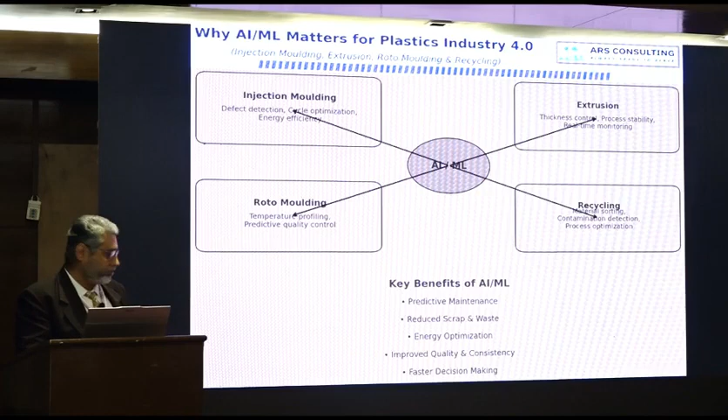Now, what are the myths? Everyone thinks that once AI comes, automation comes, our jobs will go away, manpower will be at risk, unions will form. Not really. It is still a myth. Why is it a myth?

The concern is automation removes jobs. Not really. In automotive AI, ML, IoT, it is just automating the task, but not the jobs. You need a programmer, you need a performer, you need a person to access the IoT. So it will not take away the job.

Second myth, it reduces the operator need. Not at all. Operators become smart machine operators. So we are elevating the operators, not taking away their jobs.

Third, data replaces decision making. Not at all. Data just supports human management. Ultimately, human resource is the one who decides.

Fourth, machines control everything. Not really. Humans train the machine, the machine does not train itself. Humans train the machine, monitor and optimize the machine.

Last, as I said, everyone's job will go away - not really, that's the myth of loss of employment. Upskilling happens in AI and ML, and reallocation of manpower occurs. So if anyone says AI/ML will take away jobs, we can confidently say no, not at all. In the plastic industry, we are creating smart manufacturing, so it will create more jobs for human resources.

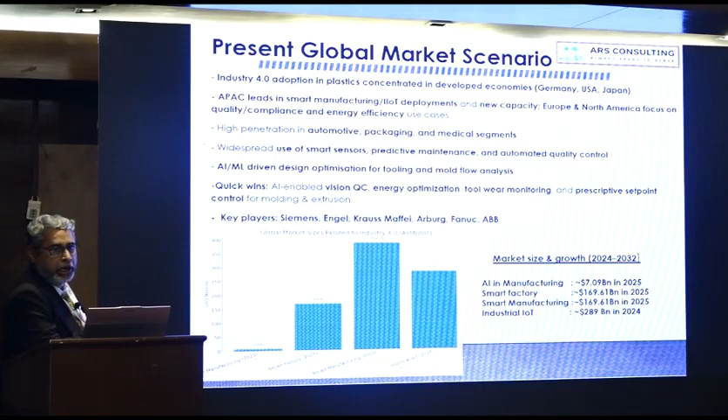Next, present Indian market scenario. We talked about global, now how it works in India. I have got the data from valid and trustworthy sites, marketing research insights.

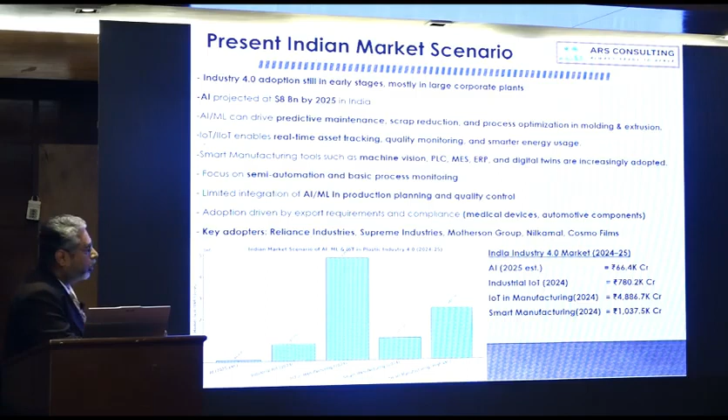The AI potential market is around 66,400 crore, industrial IoT is around 780 crore, IoT market potential is around 4,886 crore, and smart manufacturing is around 1,000 crore market. Venturing into this definitely involves higher capital and resources, but the market is really growing.

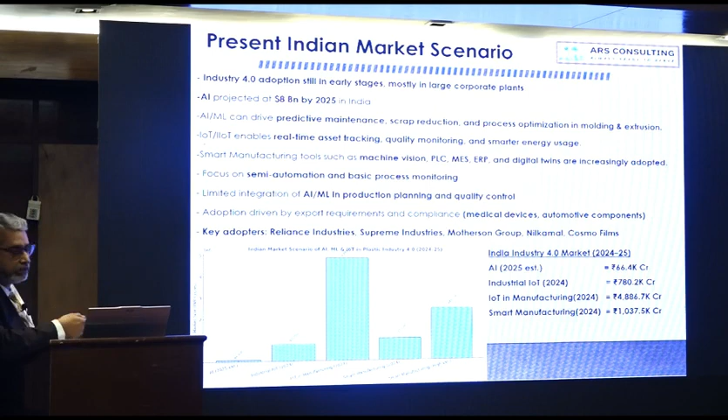Next, let's see the key connectivity standards. There are basic parameters like IoT and cloud computing. If we set up some process and unforeseen circumstances happen, we need not worry, since all that data is stored in the cloud.

Next is open platform communication unified architecture. What it does is machine to machine communication. If we have say 100 machines on a shop floor, it is not possible to communicate from one machine to another manually, that job is done by AI/ML. So that is what we call open platform communication unified architecture.

Two specific software, especially Euromap 77 and Euromap 83, have been built on OPC UA to define the interface between injection molding machines and manufacturing execution systems.

Again, industry IoT platforms, there are new platforms coming up, like for example logistics can be integrated with manufacturing, and third-party applications. Suppose if any third-party molding is to be done, that also can be integrated in IoT.

Next, we have standard network protocols. Through computer, suppose you are getting job work done through some other vendor, that can be controlled through software. Next is wireless communication, like Bluetooth in phone and laptop, that is possible in machinery also.

Like we have Zigbee, LTE, 5G, enabling flexible and scalable connectivity that can be connected to sensors and machines, so that sitting in the factory environment, you can access it from mobile.

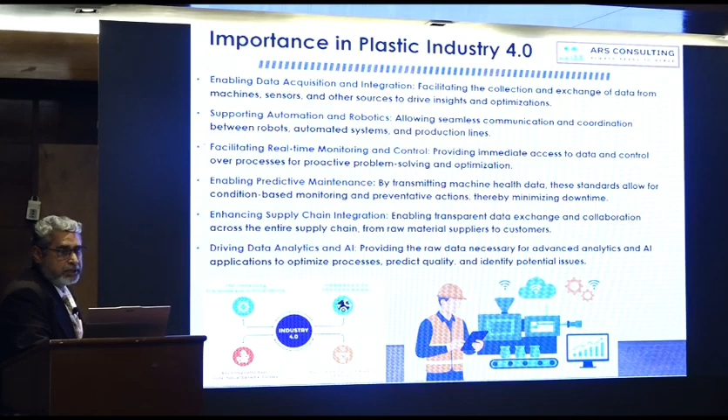Now, what is the importance? Again, enabling data acquisition and integration. Next is facilitating real-time monitoring and control. Third is enhancing supply chain integration and driving data analytics and AI.

Now let me give a brief on how injection molding state can be implemented with this AI so that it really works as smart manufacturing.

High data density per cycle. For example, you have so much data, as Sandeep sir has said, there are so many data points: clamp force, melt pressure, cavity pressure, screw position. All this data can be fed in, so that we don't have to search for a manual or anything.

Next, the common innovations: one is closed loop cavity pressure control and AI based quality inspection, so we don't have to visualize the components manually. Through software, we can have a closed loop system to control the quality, and remote monitoring.

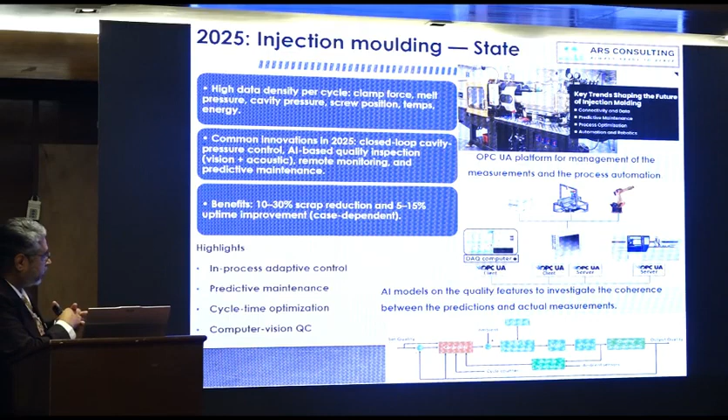Before any unforeseen circumstance or upset happens in the machine, that can be prevented through predictive maintenance. What is the benefit in injection molding? I'll cite examples as well: 10 to 30% scrap reduction, and 5 to 15% uptime improvement.

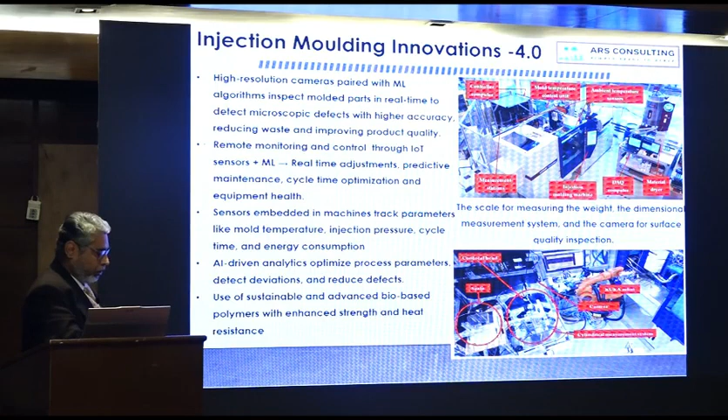Now these are a few specific examples I have given. Hope this is visible. These are the areas where AI has been applied.

The scale for measuring weight, the dimensional measurement system, and the camera for surface quality inspection. If we depute a person, a QA person for each activity, we need at least 6 to 7 people to do that. But if we depute an AI ML system, it does everything in one shot.

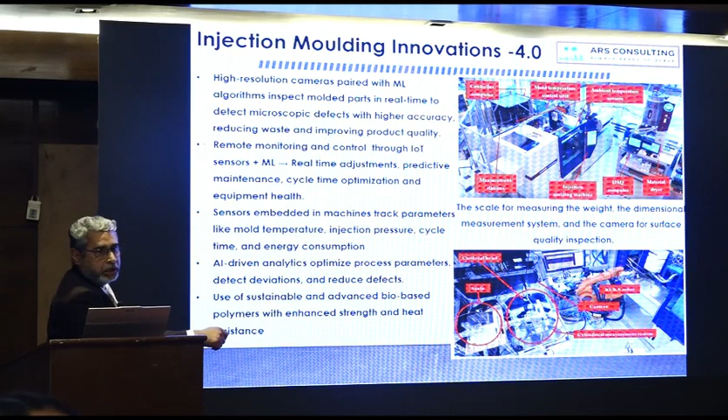Next, injection molding innovations. What do we mean by digital twins? This digital twin actually optimizes and simulates the molding cycles and reduces the trial and error process.

Next, RFID tags can be attached to the components. Suppose if 30,000 components are done and go into the assembly line, and any particular part is found to be defective, that can be retrieved through RFID tags. Through manual batch process it would be very difficult for us to track it.

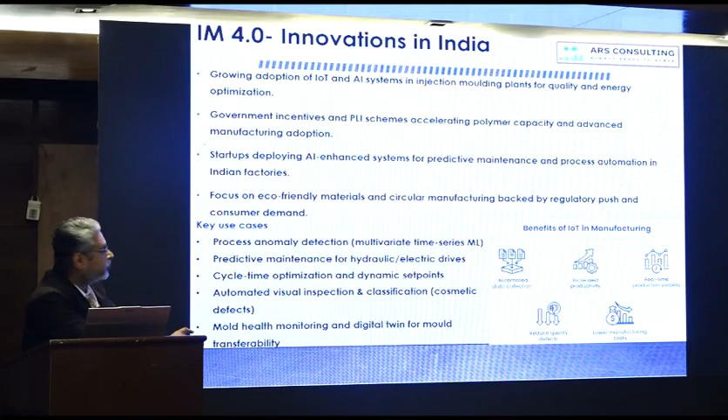Next, what are the innovations happening in India? One is growing adoption of IoT and AI systems in injection molding plants. Second, many startups, I'll give examples and case studies in the coming slides. AI enhanced systems for predictive maintenance and process automation in Indian factories.

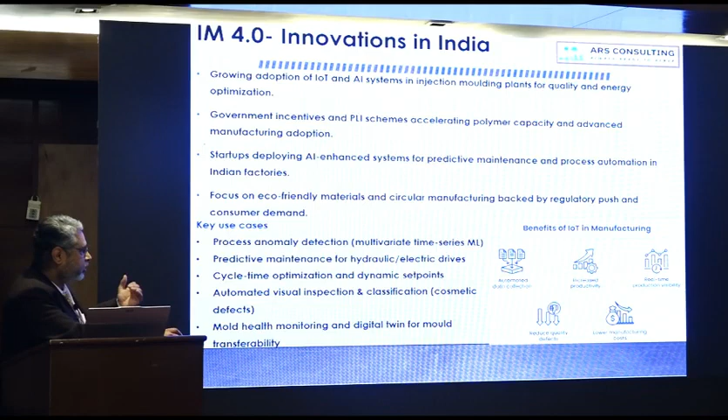What are the key use cases? One is process anomaly detection, second is predictive maintenance, third is automated visual inspection, fourth is mold health. When a mold completes, say 5 lakh shots or 10 lakh shots, that health monitoring can be done by AI ML itself.

Now I would like to run a small video.

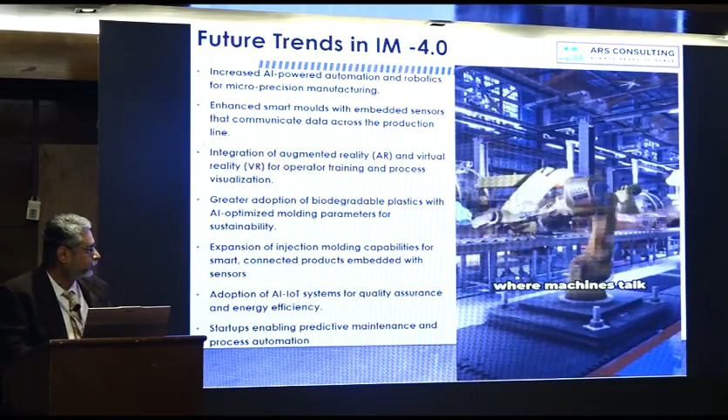Sound please. Sir, sound. Volume.

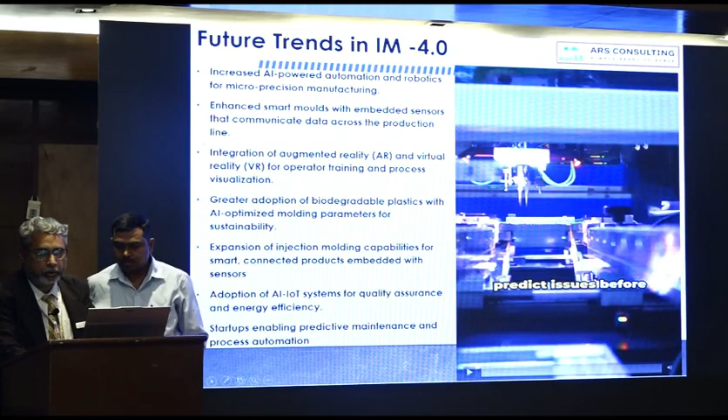Let's talk about IoT, the Internet of Things. Sensors on machines collect data and send it to the cloud. This means faster problem solving and less downtime.

Next up, AI and machine learning. These technologies predict issues before they happen, making your factory more efficient and cutting costs.

And don't forget about robotics. Robots are taking over repetitive tasks, freeing up humans for more complex work.

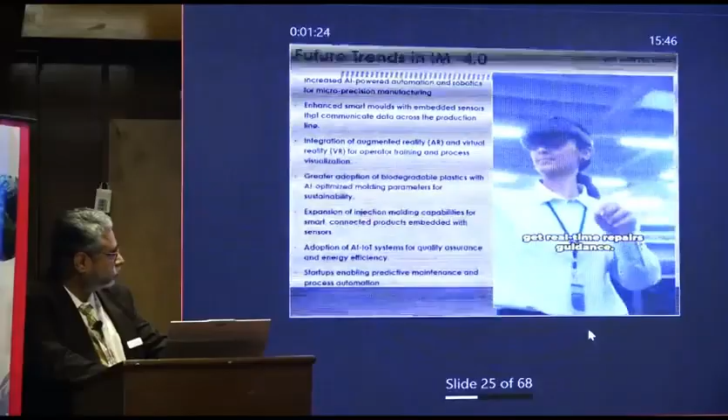Finally, augmented reality. Imagine technicians using AR glasses to get real-time repair guidance. It's like having a tech guru by your side.

Industry 4.0 isn't the future, it's now. Get on board and transform your factory today.

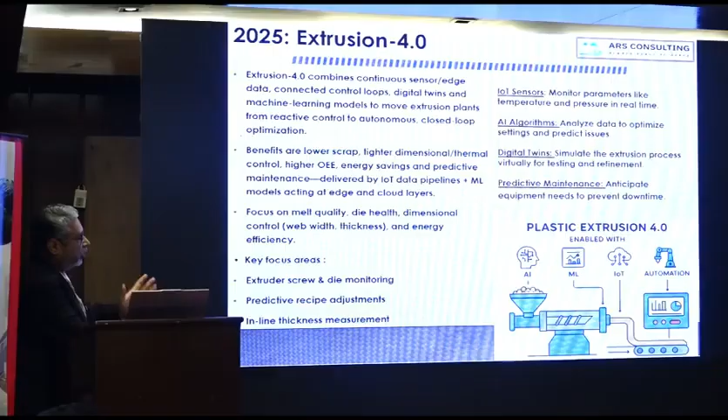I'm done with the injection. Let me go with the extrusion. Extrusion is enabled with AI, ML, IoT and automation.

Here again, IoT sensors monitor parameters like temperature and pressure. Algorithms optimize the settings and predict issues. Digital twins do the testing and refinement, and predictive maintenance does the preventive downtime.

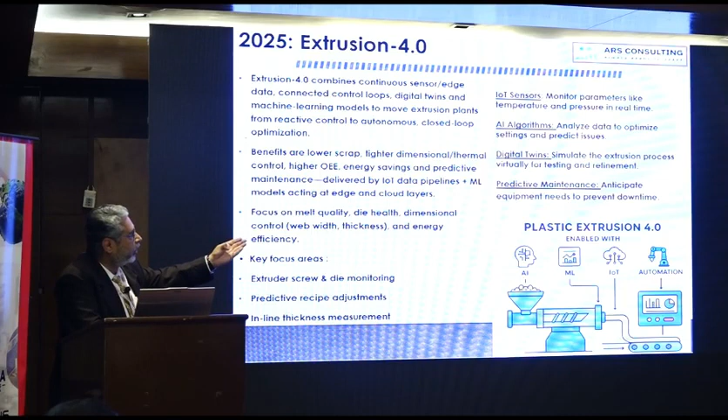I'll just cite a few examples, maybe pipe or profile or anything. This intelligent optimization processes sensor data to identify patterns, predict defects, and adjust machine parameters.

And digital twins create virtual models. Suppose you have any specific profile or specific model to be done, that can be done through digital twins. That is a modeling thing.

What are the core components of extrusion? Same, whatever we have seen in injection, same thing is available in extrusion 4.0.

These are all the parameters required for implementing this 4.0. Algorithms analyze the sensor data to maintain extrusion parameters.

Then real-time data for IoT melt. Whenever there is melt temperature monitoring or any process temperature, that is done by IoT.

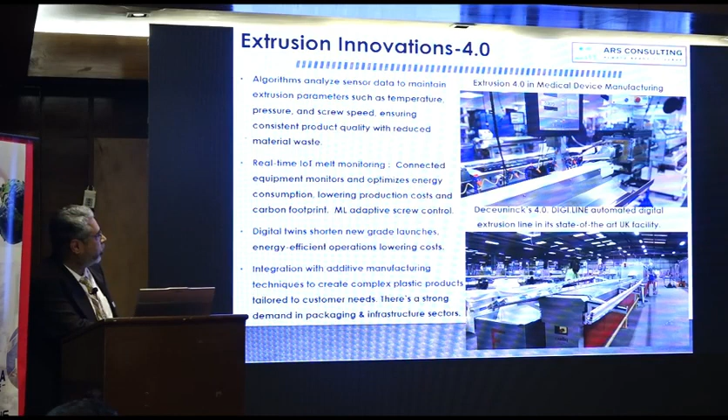And then digital twins shorten the new grade launches, and integration with additive manufacturing. Say for example, you want to create a new plastic product, new design, that additive manufacturing 3D software can be incorporated with this extruder.

Next, innovation in India. What are the major innovations happening: one is rapid adoption in mid to large extrusion shops, and then PLC and SCADA systems upgrade with cloud analytics, then government manufacturing and digitalization initiatives, plus sensor edge cost reductions that accelerate the process.

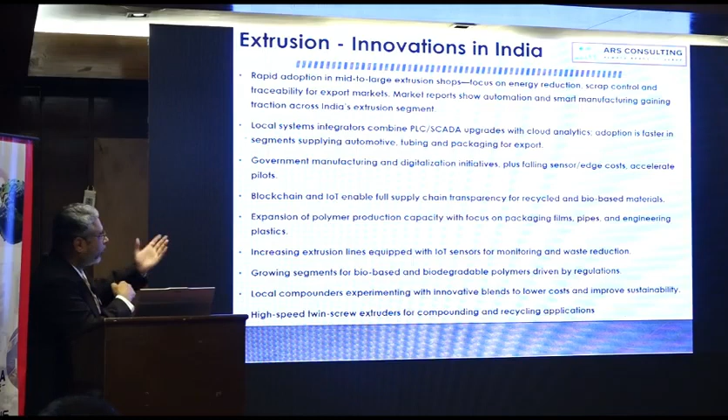Then blockchain and IoT enable the entire supply chain, starting from incoming raw material to outgoing. The entire thing can be monitored by blockchain and IoT. And increasingly extrusion lines are equipped with IoT sensors for monitoring waste reduction.

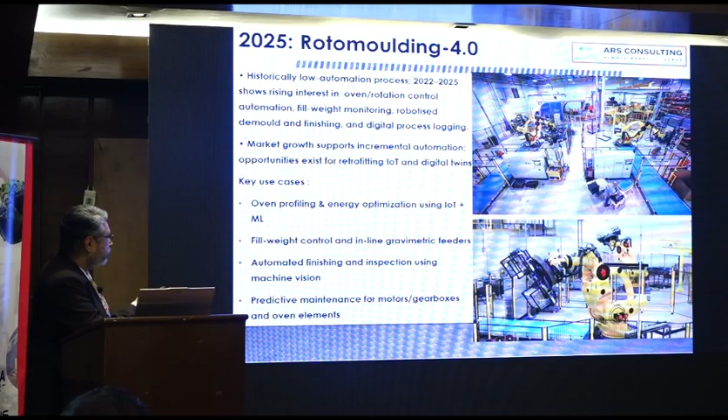The key use cases can be: one is oven profiling and energy optimization using IoT ML. Next, fill weight control and inline gravimetric feeders. Next, automated finishing and inspection using machine vision. Then predictive maintenance, as we do in injection and extrusion - in rotomolding also it's possible.

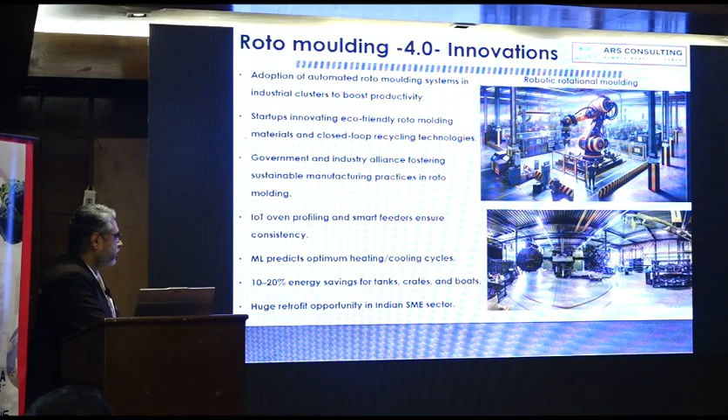A few innovations, for example, startups with eco-friendly rotomolding materials with closed loop recycling technologies have implemented this in Europe, but in India it is yet to be done. Machine learning predicts the optimum heating-cooling cycle and facilitates 10 to 20% energy savings for tanks, crates and boats applications. The most important thing is, it's a huge retrofit opportunity in the Indian SME sector.

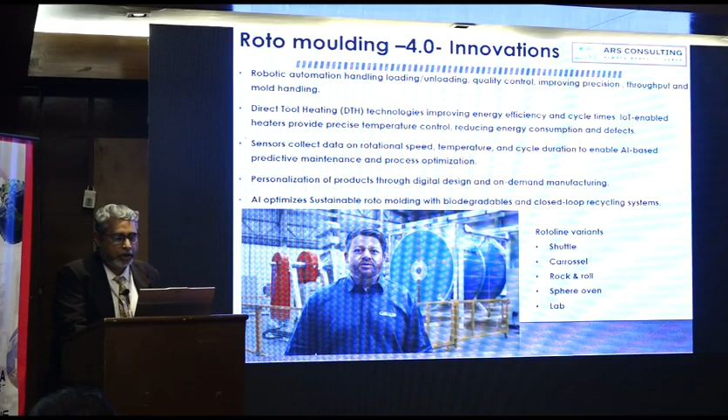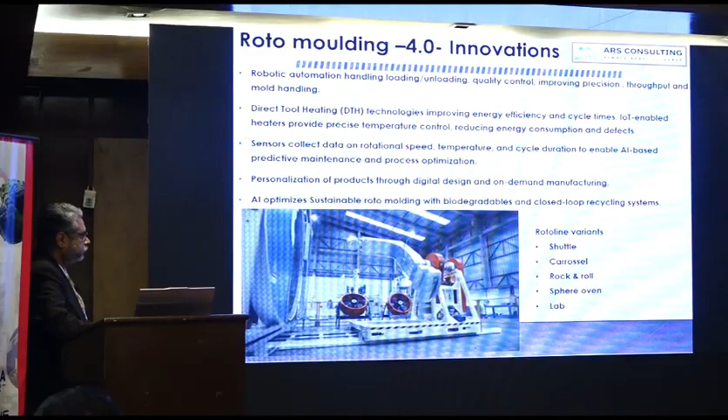Welcome to Rotoline. Today I want to show you the Rotoline shuttle machine. Shuttle machines are capable of producing any part in polyethylene. The machine is divided into three main parts: a central oven and two carts. This setup with an independent recipe for each cart allows efficiency in production of many parts. The shuttle machine is the best option to manufacture parts of different shapes.

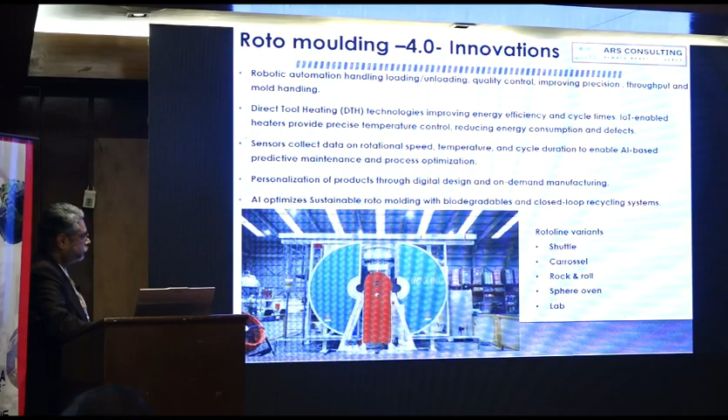The shuttle machine has a cylindrical oven to guarantee efficient airflow throughout the process. The oven structure is sealed to prevent heat loss, resulting in gas consumption economy. The standard machine is equipped with straight arms and can be replaced with an offset L or offset C. The arm speed can be programmed on the recipe screen, along with temperature, oven time, and reverse rotation.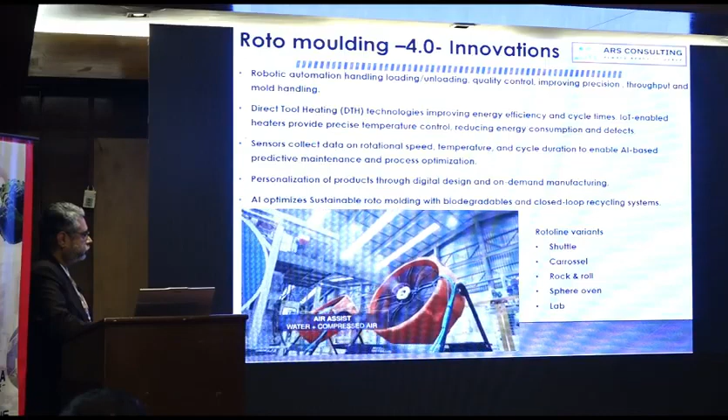The machine has cooling fans on each station. The air assist cooling developed by Rotoline has continuous water and airflow, preventing water accumulation in front of the fans, speeding up the cooling process. The equipment goes through strict manufacturing, quality, and testing control. Installation is always supervised by a Rotoline technician, with fast and efficient technical assistance in three languages: English, Portuguese, and Spanish. Panel connections are made with quick disconnect plugs, reducing machine installation time.

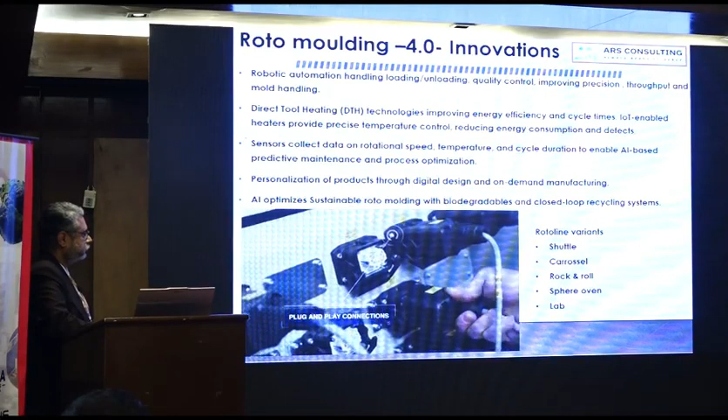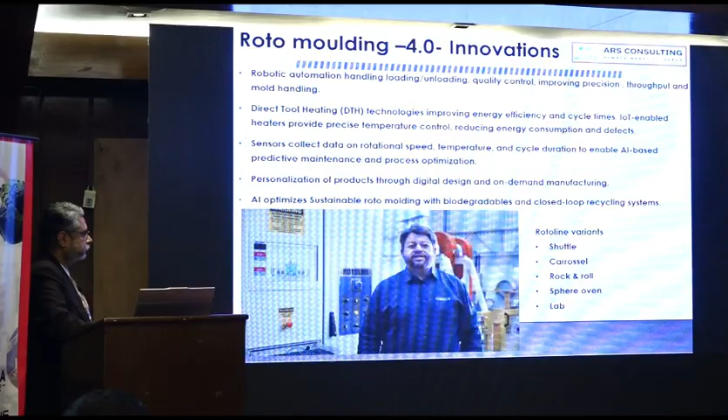To facilitate the operator's routine, the interface includes a computer with a navigation system that is easy to operate using a mouse and keyboard. The software can display many informations such as fault log, diagnosis, product information, PLC inputs and outputs, among others. Now you know a little bit more about the shuttle rotational molding machine. Come and visit us.

Welcome to Rotoline. Today I want to show...

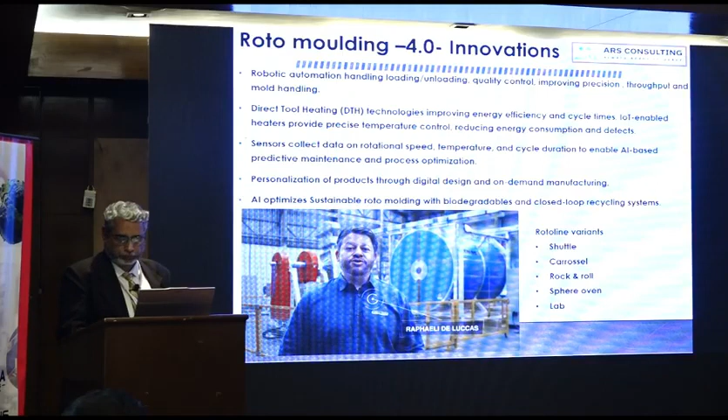Next, a rotomolding case study: development of a specialized fuel tank for a groundkeeping equipment manufacturer. There was an issue in heat flow which could be focused on the appropriate area for improved material dispersion and improved threading. There was also an issue where direct heat flow allowed for changing wall thickness. After implementing this, controlled heat focus allowed for unique geometric forming, which was not possible in the conventional rotomolding process.

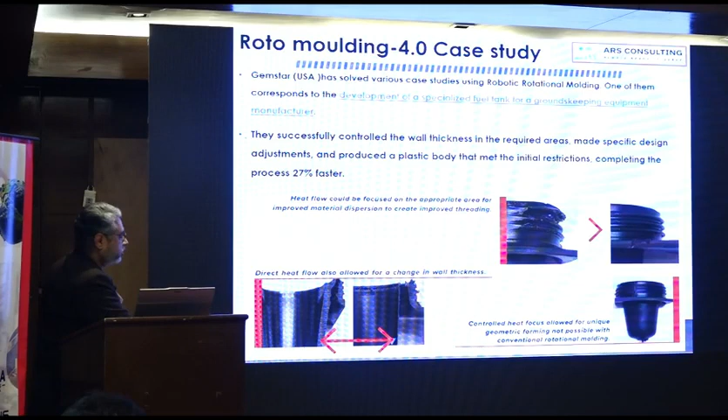Now, a few more innovations we have seen: smart sensors and Internet of Things, allowing operators to monitor performance remotely, and CNC machine-enabled molds that enable the creation of more complex designs with tight tolerances and high dimensional precision.

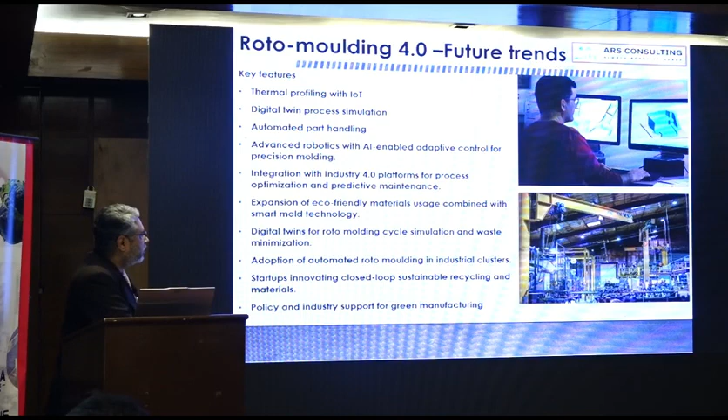Now, future trends. One is thermal profiling with IoT, digital twin process simulation, automated part handling, and integration with Industry 4.0 platforms for process optimization. Digital twins can be deployed in the rotomolding cycle for simulation and waste minimization.

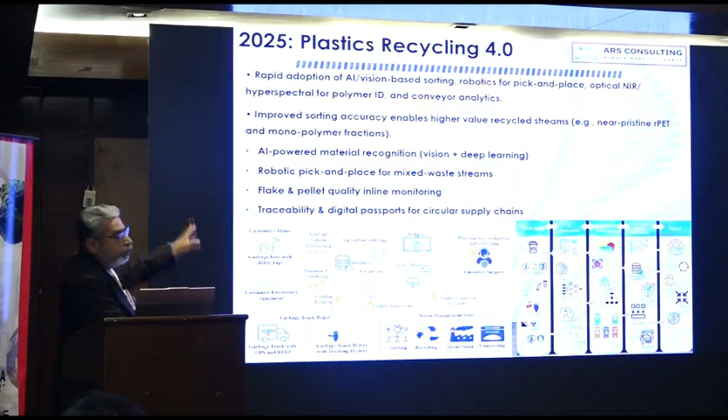Now, looking at 2025 in the recycling industry: one process is sorting the incoming and outgoing material. Another is rapid adoption of AI and vision-based sorting, robotics for pick and place, optical NIR and hyperspectral polymer ID, and conveyor analytics. These are all new technologies implemented in recycling industries in Europe.

I'll run a small video, please.

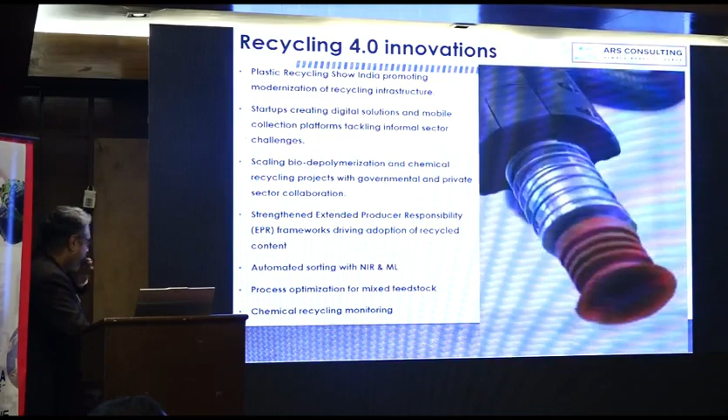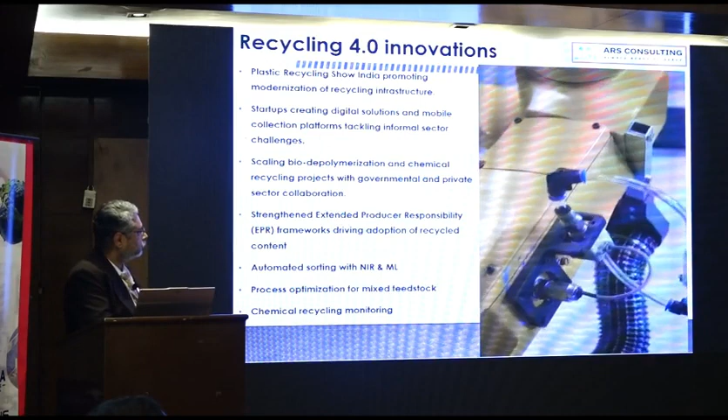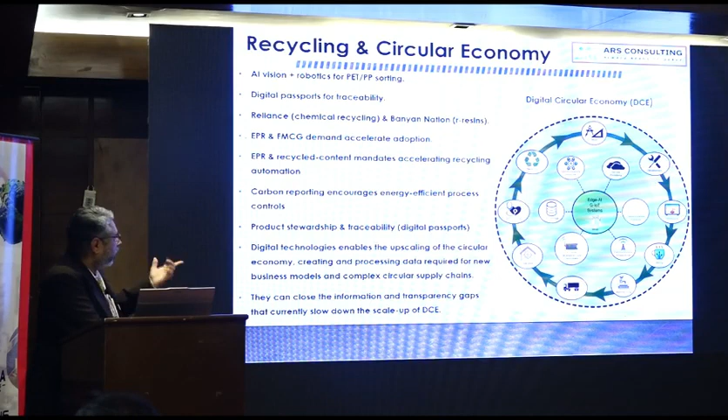Next, recycling and circular economy, already well known to us. EPR and FMCG demand accelerate adoption. There is a need for applying AI and ML, edge AI systems, into recycling. Carbon reporting encourages energy efficient process controls, product stewardship and traceability through digital passports—right from the scrap to the end recycled product—which really facilitates the circular economy.

Future trends in Industry 4.0 in recycling: waste management is going to revolutionize, scaling up biodepolymerization and chemical recycling as mentioned by the CIPET director. AI finds a vital role in this.

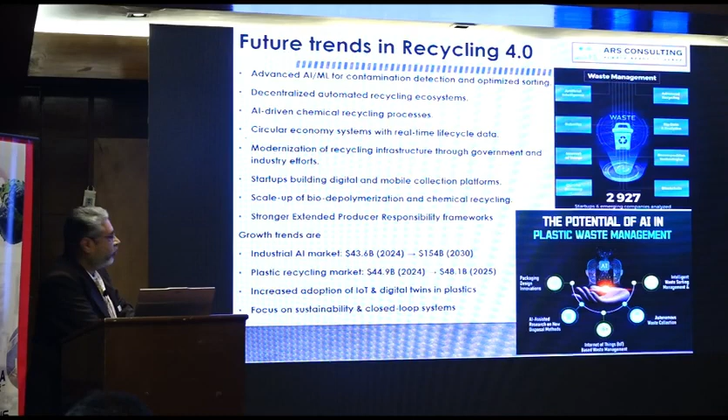Impact and return on investment for plastic Industry 4.0: we have an analysis comparing AI in manufacturing versus estimated plastic industry growth. There is a phenomenal increase in this domain.

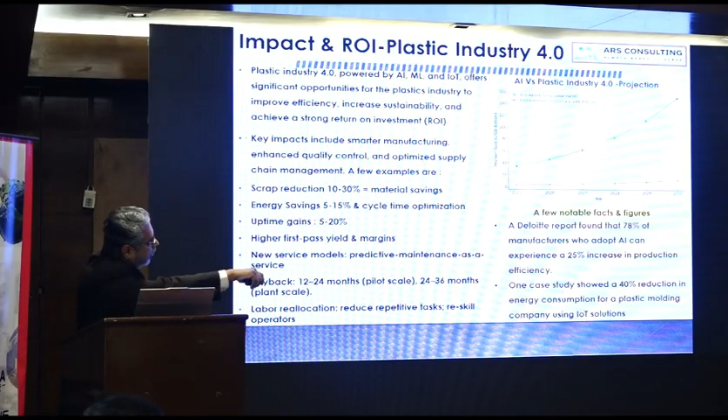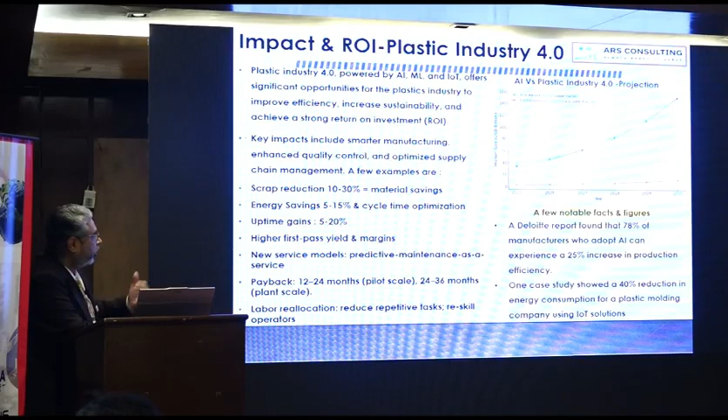The blue line shows that starting from 25 to 30, the growth trajectory is very fast. It will enable scrap reduction of 10 to 30% in material savings, energy savings between 5 to 15%, cycle time optimization, and uptime gains—not just downtime reduction—between 5 to 20%.

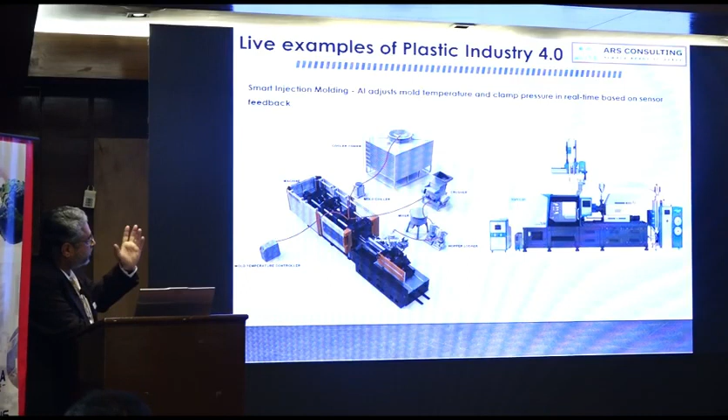These are all the major application segments where AI/ML finds a vital role, with live examples of mold changes, especially mold temperature and clamp pressure, where AI/ML plays a vital role.

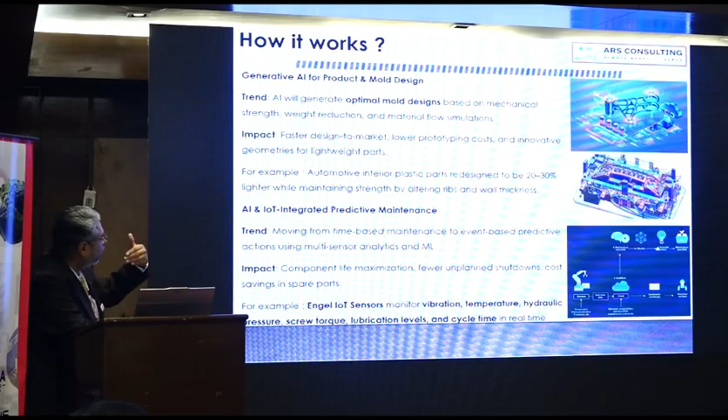How does it work? One is generative AI in product and mold design. The trend is it will give optimal mold designs based on mechanical strength and weight reduction. Next, the impact will be faster design to market. It will reduce the time, instead of doing a prototype and then conceiving a full-fledged mold.

And moving from time-based maintenance to event-based predictive maintenance, that can be done with AI/ML.

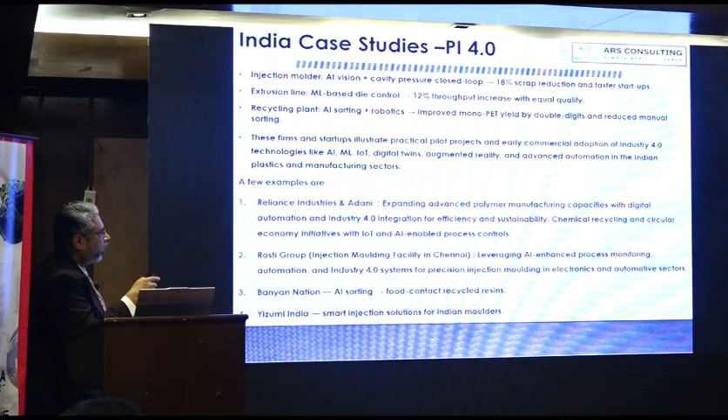India case studies. Let us see some of the case studies. Reliance Industries and Adani have implemented AI/ML with advanced polymer manufacturing capacities, having implemented digital manufacturing, and they increased efficiency as well as sustainability.

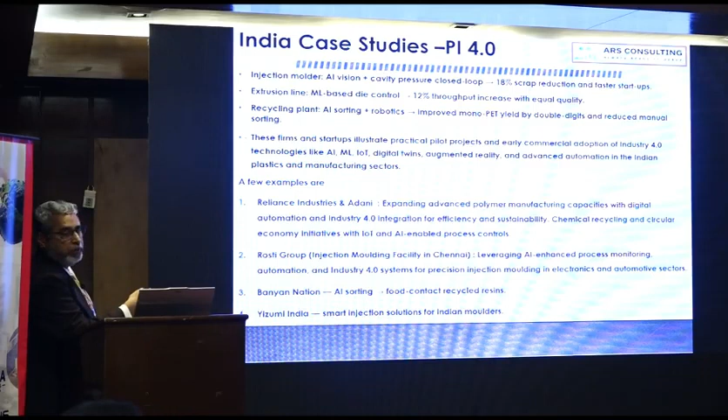Second is Rosti Group, near Chennai, they implemented leveraging AI enhanced process monitoring system. Third is a Hyderabad-based company called Banyan Nation, they implemented AI sorting. Fourth is Yizumi India, a well-known company, they implemented smart injection molding solutions for Indian molders.

Next is Recykal, again a Hyderabad-based company, they introduced a digital platform for plastic waste traceability and transparency. Next, Schneider Electric in Bangalore and Hyderabad, they have integrated energy-saving IoT and automated solutions, especially for switch gears.

Then Siemens in Kalwa, Mumbai, they transformed via digital twin technology and IoT to increase their productivity and flexibility. Piramal Glass, even a glass company, they have implemented AR. And Clairviz, a startup, provided an IoT sensor based monitoring system. Chizel, an Indian company, produced a B2B cloud platform for supporting SMEs.

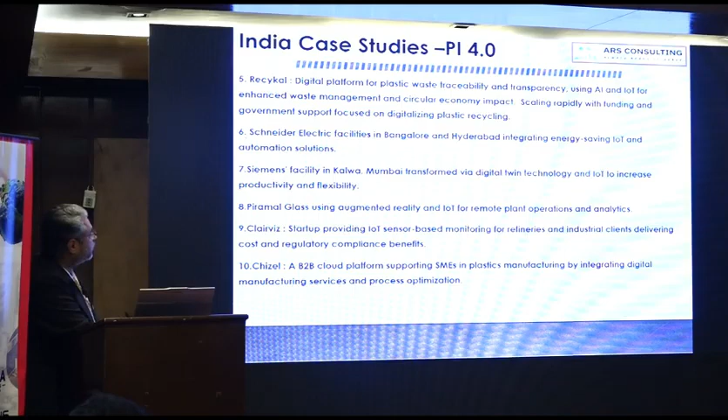Now, what are the key challenges? There are 4 main challenges. One is ensuring the quality of the data; data has to be rechecked.

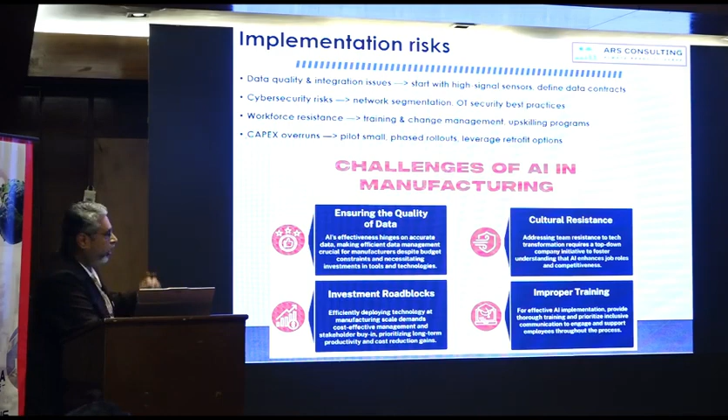Next, investment roadblocks. Most of the SMEs in India, almost 70%, are not in a position to invest in AI/ML because it calls for high investment. Next is improper training. We need a proper workforce to be upskilled to get this training.

What are the future trends? One is connected machines. As I explained earlier, Euromap and OPC UA have open communication standards which enable various kinds of technologies. Second is smart cells, that is self-contained interconnected production units. Third is greater use of digital twins and physics-informed ML.

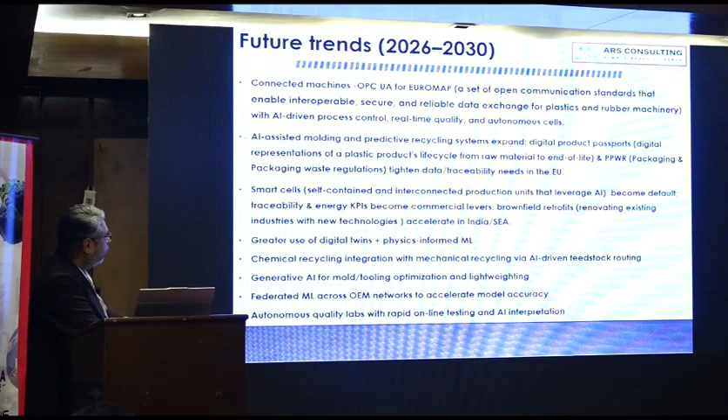Conclusion: the convergence of AI and automation with Industry 4.0 will definitely transform the industry with customization, quality, reducing waste, and enhance competitiveness in the global market.

So join us in the revolution of Indian plastic industry 4.0 with innovation, by engaging us, starting ideas, and emerging with new technologies. Let's be a part of this ecosystem with innovation and work together to implement it in the coming years. Jai Hind. Thank you.